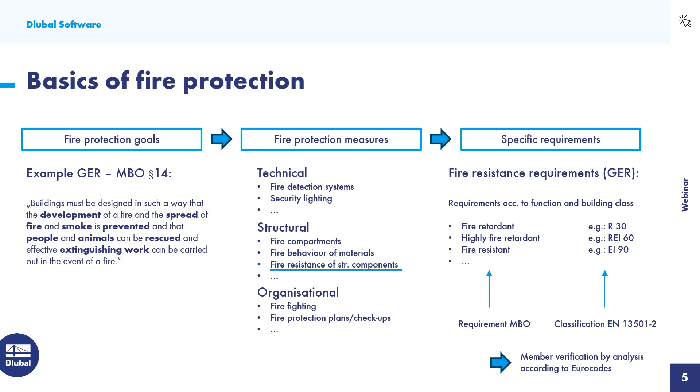So let's take a look at how fire design is regulated in the Eurocodes. I would like to start with the combinatorics. According to Eurocode 0 or EN 1990, the case of fire is to be regarded as an exceptional design situation. Accordingly, the mechanical actions are combined without partial safety factor.

The use of ψ2,1 is recommended in the main document for the leading variable action, but there are many deviations in national annexes. In Germany, for example, ψ1,1 is prescribed for leading wind actions. It is obvious that the combination rule results in significantly lower actions when compared with the permanent and transient design situation that we commonly use for the design under normal temperature.

As a safe side assumption, the loads from the code design multiplied by a reduction coefficient can also be used. However, this is generally uneconomical and therefore not recommended, especially when we use a design software that can do the correct combinations anyway, like RFEM.

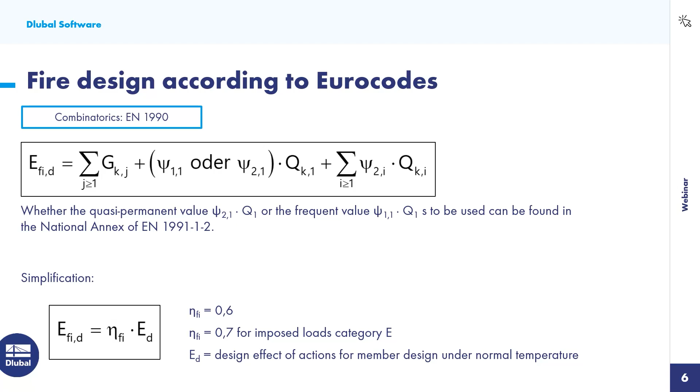In addition to the mechanical actions, the thermal action in accordance with EN 1991 Part 1-2 must also be taken into account. In the event of a fire, there's a considerable increase in the ambient temperature, and sooner or later, the structural elements exposed to the fire will heat up as well. This has a dramatic effect on the material properties of steel components on one hand. On the other hand, the temperature increase can lead to indirect stresses in case thermal expansion is restrained.

Real fire scenarios develop in 4 stages. We have the incipient stage, the growth stage, the fully developed fire phase, and the decay phase. The transition to the full fire phase is called flashover and is associated with a rapid rise in temperature.

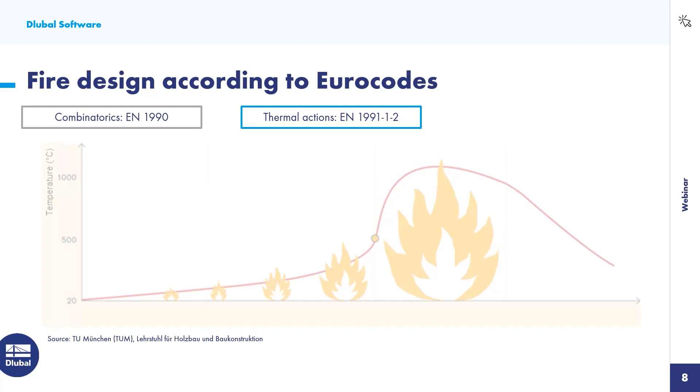For engineers, it is very challenging to accurately predict the development of a natural fire scenario. Instead of trying, so-called nominal fire curves have been established almost 100 years ago to describe the temperature development in a compartment over the duration of the fire in a simplified manner. The standard temperature curve is used for fires inside buildings.

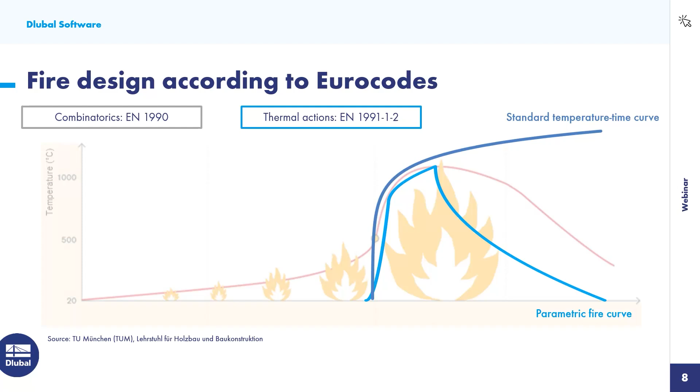This temperature curve is also used for standardized fire tests on structural elements, which means that the behavior of typical elements under this nominal fire exposure is quite well documented and verified. Alternatively, the Eurocode also allows the use of more sophisticated approaches to predict the temperature development, such as parametric fire curves, zone models, or results from CFD analysis.

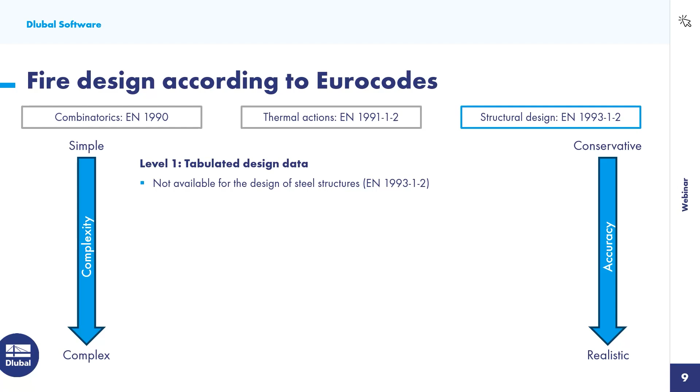The actual design of structural elements is regulated in the respective material-specific Eurocode, such as Eurocode 3 Part 1-2 for steel construction. In principle, all Eurocodes distinguish between 3 alternative methods with increasing complexity and accuracy. The simplest design approach is design by tabulated data. This is oftentimes used for fire design of concrete elements, where it is sufficient to choose the suitable dimensions, for example, wall thickness, for a specific fire class. This approach is unfortunately not available for steel structures.

In the second level, we find the so-called simplified design methods. Here, the thermal actions are prescribed by nominal fire conditions, such as the standard temperature curve for fires inside of buildings. For such conditions, Eurocode 3 Part 1-2 gives clear rules for the design of steel members. This verification can either be done based on the resistance or based on the critical temperature.

The most accurate but also complex analyses are possible under the advanced design methods. The thermal actions are usually derived by more sophisticated methods here, such as parametric fire curves, zone models, or CFD. This enables a more economic design most of the time. The design rules are very openly formulated. Any suitable thermal and mechanical analysis model can be employed. However, the validity of the chosen approach must be proven on a case-specific basis and requires a high level of expertise.

In RFEM 6 and also RSTAB 9, the resistance-based simplified design method is implemented. A system calculation under elevated temperatures is not required in this case. The design concept is very similar to the design under normal temperatures, but under reduced load as we combine actions in the exceptional design situation. The thermal action is only taken into account on the resistance side and induces a reduction of design-relevant material properties. I would like to explain this point in more detail in the next slides.

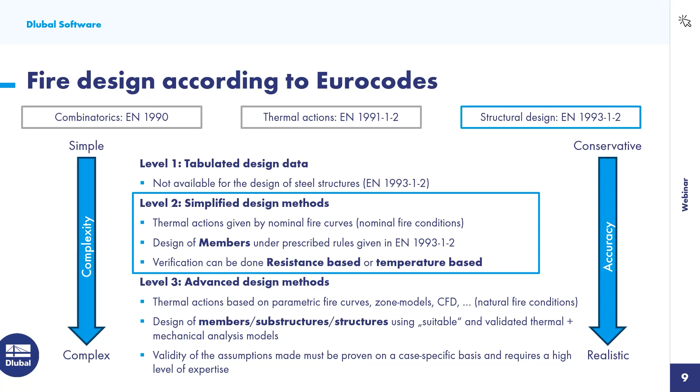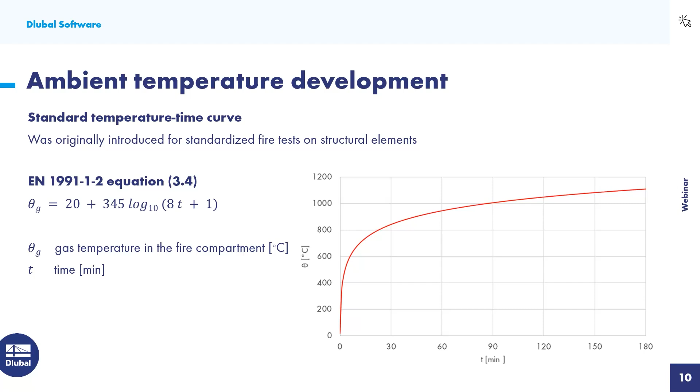As explained on the previous slide, the simplified design method is linked to the application of the standard temperature curve. This means the development of the ambient temperature during a fire is approximated in a simplified manner according to the logarithmic function shown here. The standard temperature curve idealizes the full fire phase and neglects the growth and decay phase of the fire.

So the development of the ambient temperature is specified by the standard temperature curve. However, for design purposes, we are interested in the actual temperature of the structural member. According to EN 1991 or Eurocode 1, Part 1-2, two different components must be taken into account when analyzing the transport of heat from the surrounding hot air into the heated component: the heat flux from convection, so the exchange of heat between the hot ambient air and the cold component surface in the boundary layer, and the heat flux from radiation or thermal radiation.

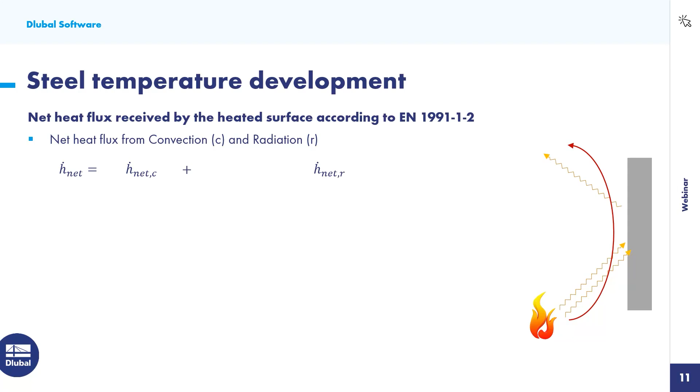I know there's a lot to explain, but I would like to leave the formula as it is right now. We will come back to the various parameters in detail later, as they are important influencing variables for fire design and any fire protection measures. For now, we take note that we can describe the relationship between ambient temperature and component temperature in the event of a fire. But how does the member temperature actually affect the design?

According to Eurocode 3 Part 1.2, design-relevant material parameters such as the yield strength and stiffness must be reduced depending on the material temperature. The yield stress only has to be reduced at temperatures above 400 degrees Celsius, but then quite rapidly, as you can see here. The stiffness already decreases at significantly lower component temperatures. At a temperature of around 600 degrees Celsius, the reduction of the yield stress already accounts for roughly 50%. At 800 degrees Celsius, it is almost 90%, so there's only very limited resistance left.

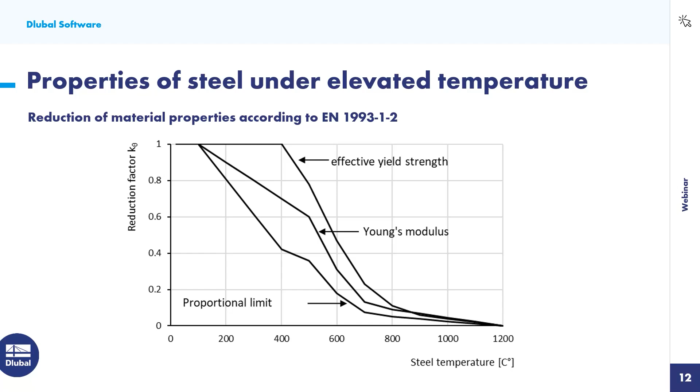Okay, so I have already prepared this simple model beforehand. It's just a simple beam with an intermediate support in lateral direction in the middle. It's an HEA 300 section and 10 meters long. I think the steel is S235. Yes. This member is already loaded by 3 load cases: self weight of the beam itself, then dead load, an additional 5 kilonewtons per meter, and load case 3 is imposed load category B with 7.5 kilonewtons per meter.

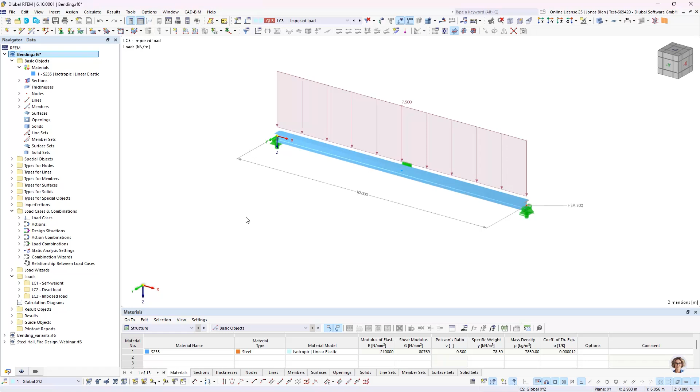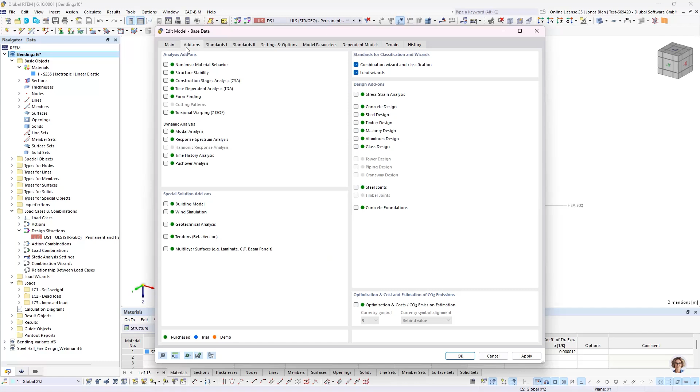I've also defined one design situation for the code design of this member, the usual combination permanent and transient, as you can see here, and this results in automatically generated load combinations. I want to start with the code design. So I switch on the Steel Design add-on, go to standards, and for now I will just use the main documents of the Eurocodes and use the common rules.

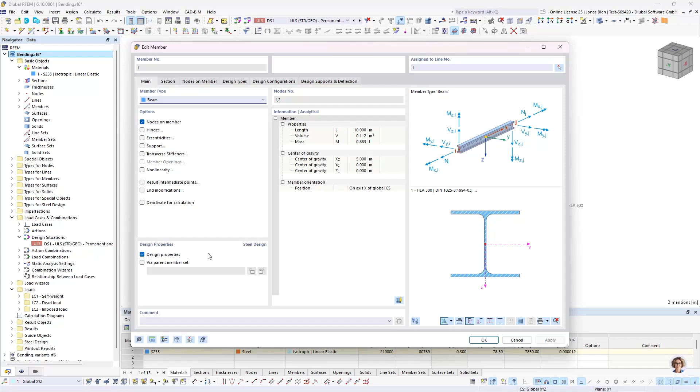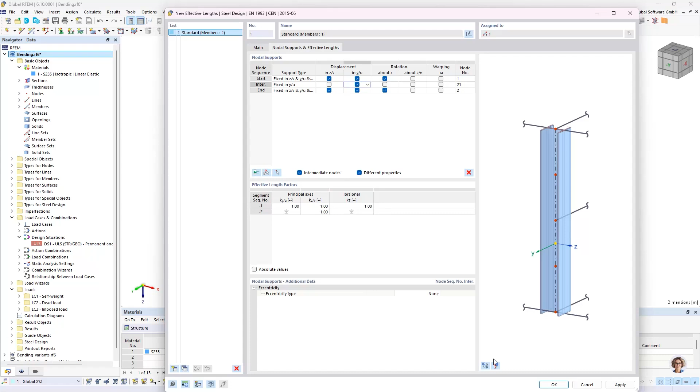As we are used to, the design add-on has already recognized that we have this member that can be designed with our Steel Design add-on. So that's fine. Besides the section checks, I also want to do the check for lateral torsional buckling according to the equivalent member method. So I will also define an effective length. And I want to leverage the intermediate node, so I will assign a lateral support here in the middle, as we have modeled it in the global model as well.

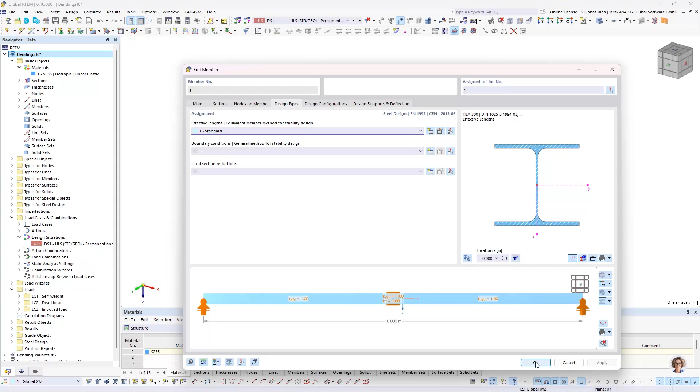Okay, so let's do this. And by the way, this assignment of the buckling length is valid for the code design and also for the later fire design that we are doing. But for now, let's start with the code design, the usual thing that we know. I will just run the simulation now, this very simple case, and we will check the utilizations that we get under normal temperature.

So as we are used to, we get section checks for shear and bending. There's also, I think, shear buckling. And since we also activated the buckling length, we also get the stability check for lateral torsional buckling. We can see that the maximum utilization is around 83%, so this is completely fine. Everything's good so far. So now let's see how this changes when we investigate the fire scenario. Let us do all the adjustments that we need in order to activate this.

First of all, we need a design situation that is appropriate for our fire case. So I will add a second design situation for the accidental load case using psi 2,1 as it is prescribed in the main documents of the Eurocode. We can again check the combination rule, and this is totally fine for us and looks like the rule that I showed you before in the slides. Okay, so I get two additional load combinations now for the fire situation.

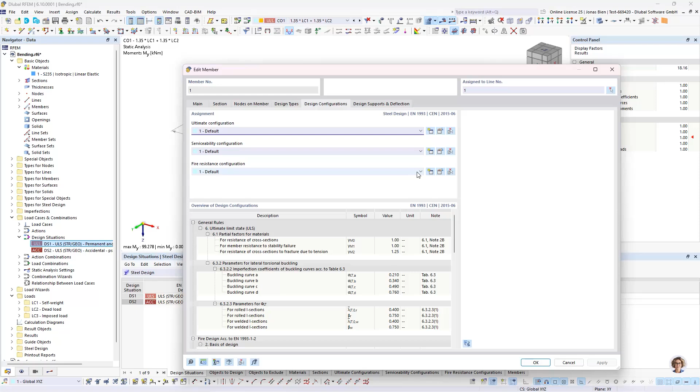And in here, we have to, first of all, define what the resistance class of my member is going to be. So at what time I want to perform my fire design checks. In this case, I would assume that my member needs to survive for 30 minutes, so it has an R30 requirement. So I will set 30 minutes as the required time for the fire resistance.

We can also see that here under the temperature curve for determination, we have by default set the standard temperature time curve, and this is the one that we want to use for internal fires and the member design method here. We could also give a manual temperature that the program then takes to perform the fire design checks, but we want to have the temperature of the steel defined by the standard temperature time curve here. And we want to do the check after 30 minutes. The remaining parameters I will not touch yet. We will come back to this later.

So I will just assign this by clicking OK, and then I will run the steel design again. So we have to solve now the two additional load combinations, and then the steel design runs again. And first of all, I want to compare the forces that we now have to take for the design. So if we check the maximum bending moments for design situation 1, so for the cold design case, we have a maximum bending moment of almost 240 kilonewton meters, while in the second design situation under accidental combination, we get more or less 100 kilonewton meters.

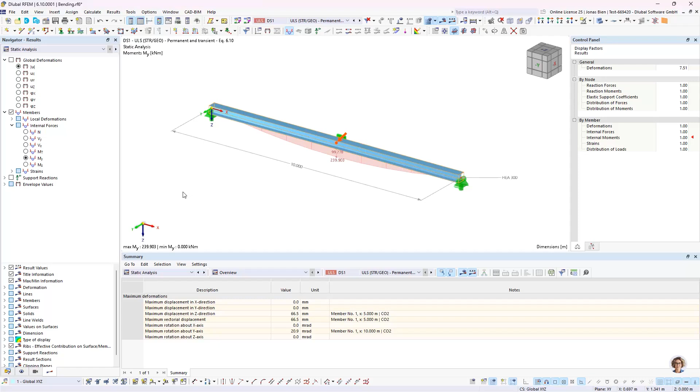So the load that we need to take into consideration in the hot design is much smaller than in the cold design. However, as we could already see, we now have a big problem with our design verification checks. As we can already see here, the maximum utilization is over 300%. So that's not good at all. So let's check why that is, and how come the utilization is so much higher than in the cold design stage. So let's actually compare some design checks.

We could start with the bending check here about the strong axis. We will start with the cold design. So we are very used to this. So we have the 240 kilonewton meter design bending moment. We do the section classification. We see we have a class 1 section. That means we can use the plastic design resistance here to calculate our utilization. And in this case, we have a utilization under 80%.

But how does this change in the fire design situation? So let's check the respective check under increased temperature. We see we have a smaller design bending moment as already shown before. And now we already also have a different section class. That is interesting. And we can also check what is the reason for this.

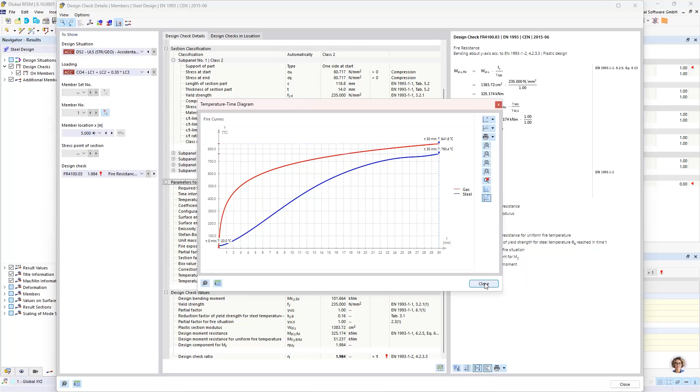There are also some other parameters here given for fire resistance. Up here we find all the settings that we have assigned to this member by the fire design configuration. And then we have some additional parameters here that I will focus on later. But for now, we can see, okay, for the cross-section checks, we have a drastic reduction of the resistance due to the increased temperature, which is very high in this case.

Maybe we can also check the stability design check, because that also reveals some details to us. So first of all, we calculate the critical bending moment the same way as we do it for the cold design. So I think this 757 should be the same for the cold case as well. When we check the stability design check, yes, it is 1-to-1.

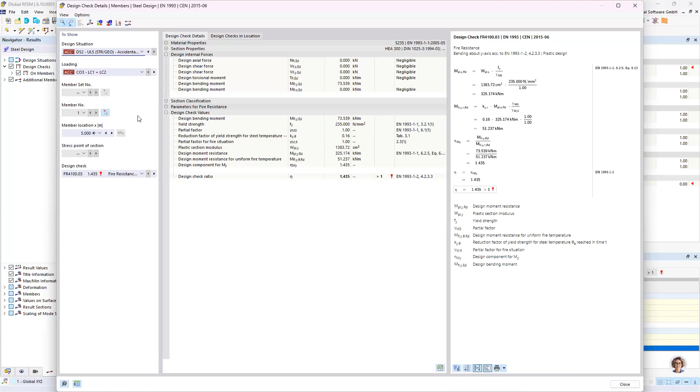But then in the fire situation, we have to again reduce it by taking into account a modified dimensionless slenderness. And in this case, this dimensionless slenderness is not only modified by the reduction factor for the yield stress, but also depends on the reduction factor of the stiffness, because of course stability design checks are also very much dependent on the stiffness of the system. So any degradation on that side will also alter our verification check for instability.

Another important point is the derivation of our imperfection factor. While in the cold case, this is dependent on the cross-section buckling curve, here it is only dependent on the material of the section. So there are slight adjustments, but otherwise the schema for the verification checks is very similar to the cold design case.

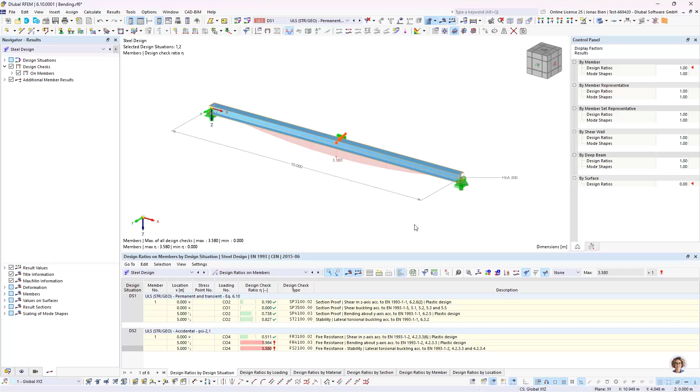I think we can agree that our first attempt to verify the fire resistance of this beam was not very successful. So yeah, what can we do to increase the fire resistance of our beam? Of course, we could lower the loads or increase the section size, but we have seen that the member heats up very quickly and we have thus only minimal strength and stiffness after 30 minutes.

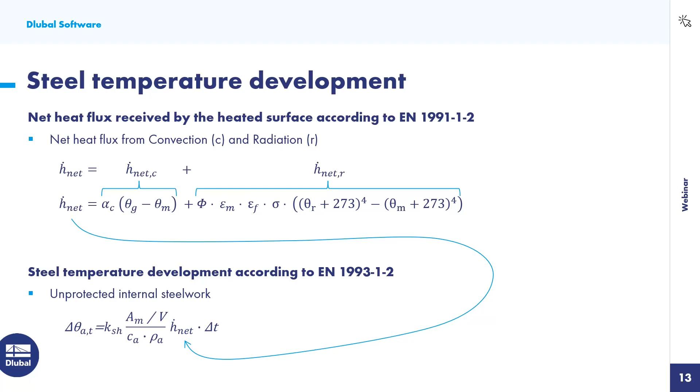To discuss possible measures we can take to delay the heating process, I would like to come back to our formulas that describe the heat transfer from the ambient temperature into the structural element. So we've seen these before, and if we combine the two formulas, we get this quite long expression here.

Most of the parameters represent physical constants that we as structural engineers cannot influence as much as we'd like to. There would be the specific heat of steel, the density of steel, the coefficient of heat transfer, the configuration factor, the emissivity of fire, and the Stefan-Boltzmann constant. Those we shouldn't touch at all.

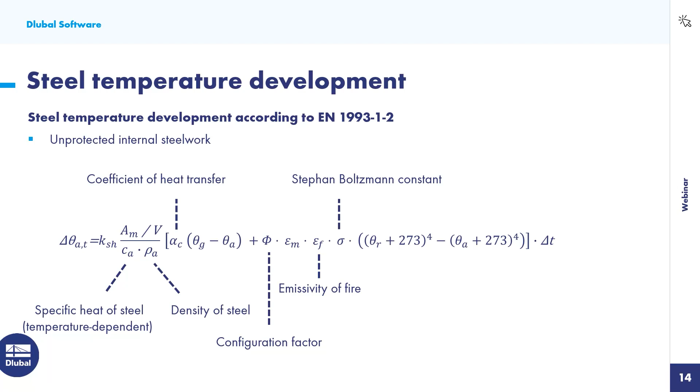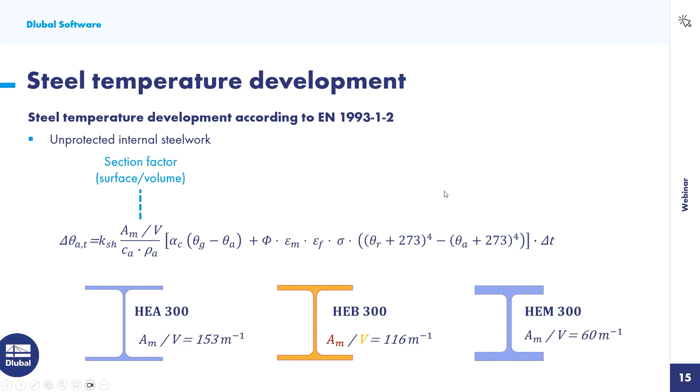This means that more compact cross-sections have a lower profile factor, as demonstrated here in these example calculations, and as a consequence, and since the profile factor is in the numerator of this heating equation, compact sections heat up more slowly. And we will check this in a minute in the model again.

But there are also other ways to reduce the profile factor. For example, if one side of my cross-section is protected from direct fire exposure, as shown here in the lower left figure, I can reduce the circumference by one flange width.

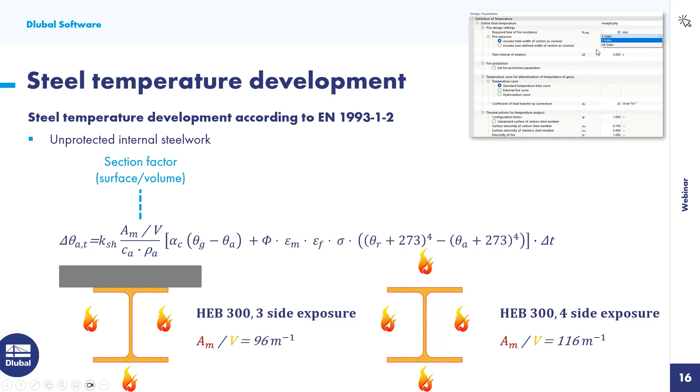So this could be relevant if we place a column next to a concrete wall or put a concrete slab above a steel girder without leveraging composite action. Such a situation can also be considered in our program through the fire configuration settings. I will also show this later.

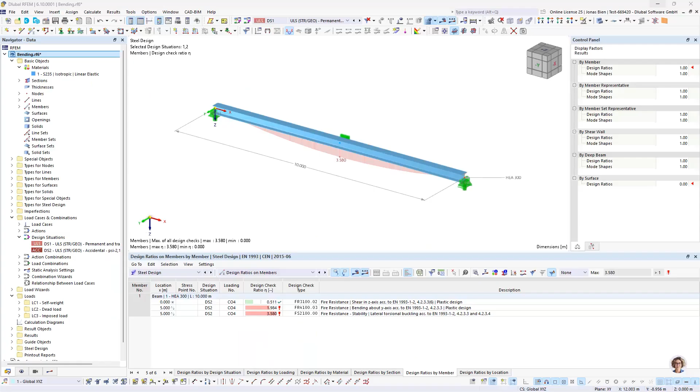Let's check if we can observe the described behavior also in our program by taking the appropriate settings. So let us switch to RFEM again. I have also prepared a second model where I basically just copied my simple beam HEA 300 that we discussed before and changed the section into an HEB 300 and HEM, as I've also shown you as an example on the slides. I applied the same loads and so on, and I conducted the fire design checks here.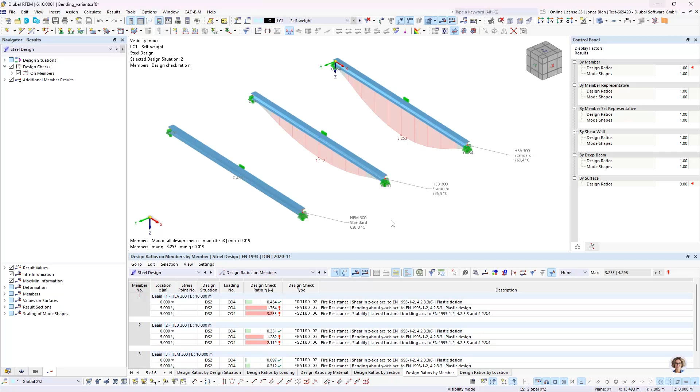And it's of course no miracle that the utilization factor for the bigger profile HEM 300 is lower. This is expected when we choose a more capable section. HEM has a higher bending resistance and also much lower slenderness, which comes into play when we look into the lateral torsional buckling design check.

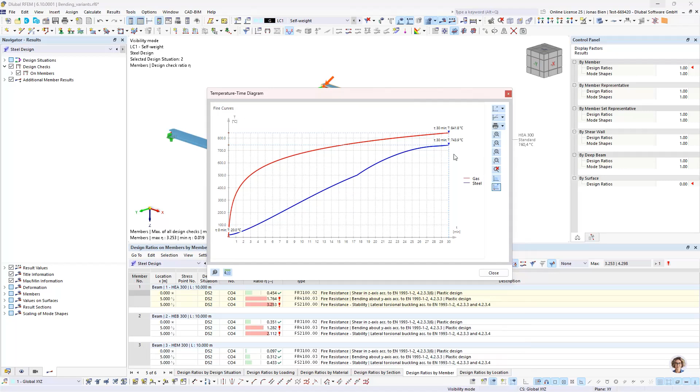But we don't want to focus on that, but on the member temperature and how it develops during the fire event. We have already checked the temperature development for our HEA 300, and we've seen that at 30 minutes we have 743.9 degrees Celsius. The HEB 300 is only a bit colder, at 735.9, but comparing this to the HEM, we see that by taking this much more compact section, we get a lot less heating. The HEM only has a temperature of 628 degrees Celsius after 30 minutes, although unprotected.

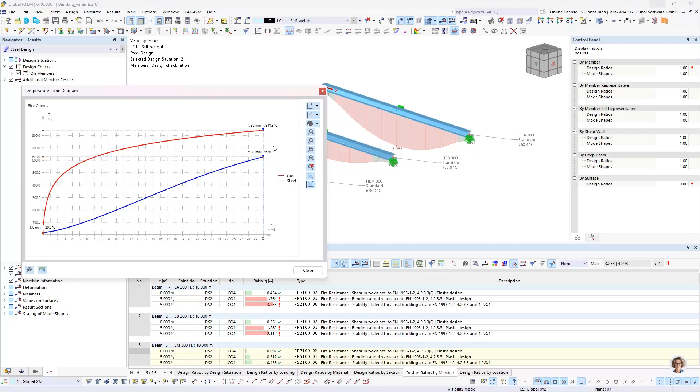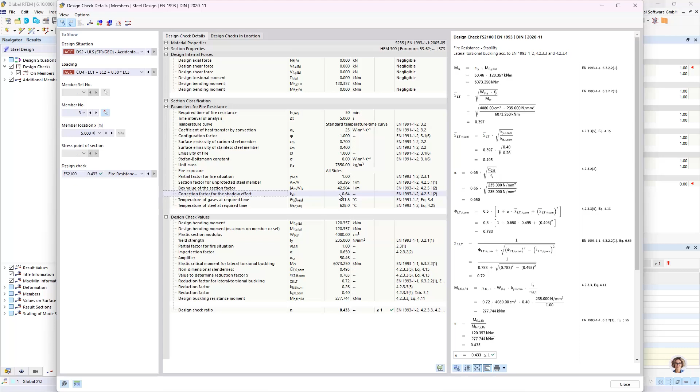We said this is because of the profile factor, and we can check this profile or section factor here in the design details for all these members. As we move on to member number 3, which is the HEM, we have a very low section factor, resulting in lower temperatures. We also see the correction factor for the shadow effect that we talked about, also given in the design details.

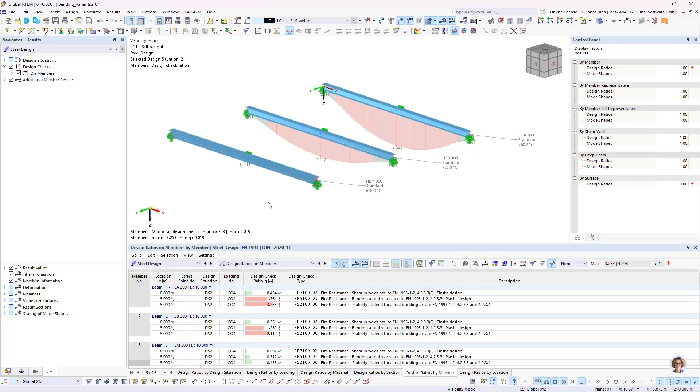Okay, so we also talked about a second option to reduce the profile or section factor, and this would be by avoiding all-side exposure to the flames, for example by a concrete slab. I have also added another example where I modeled an HEB 300 and modified the fire resistance configuration so that I only apply a 3-sided fire exposure. As a result, compared to the standard fire case with 4-sided exposure, it heats up around 30 degrees Celsius less after 30 minutes, which isn't a huge deal, but it's something.

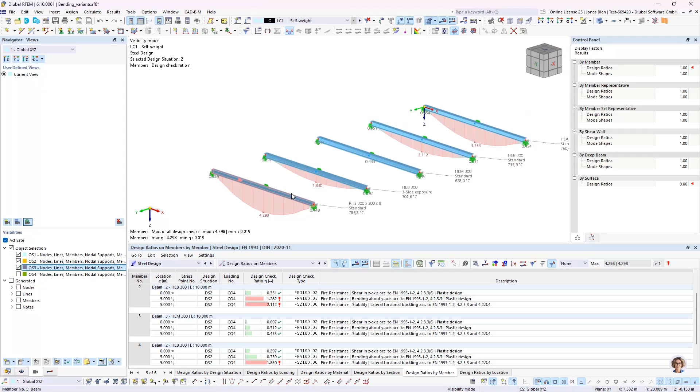And last but not least, I wanted to show the influence of this correction factor for the shadowing effect. So I also incorporated a hollow section here, an RHS profile, which has a similar section factor as the HEB 300, but it doesn't profit from the shadowing effect. In the design details we can check the k_sh factor, and in this case it is 1.0. So we couldn't leverage any of this here, and accordingly it heats up a bit more.

Okay, that's about the section choice and how the section choice modifies or impedes the heating process of the member during the event of a fire. But there's actually another factor that we can manipulate and alter to adjust the heating process. So let's go back to the PowerPoint, to the next slide.

Yeah, I would now like to discuss this factor here, epsilon m, which describes the surface emissivity of the member, not of the flame, but of the member. And this factor describes how large the proportion of absorbed radiation energy is. An ideal black body has an emissivity of 1 and absorbs all incoming radiation in theory. An ideal white body has an emissivity of 0 and reflects all radiation. Real surfaces have values between 0 and 1.

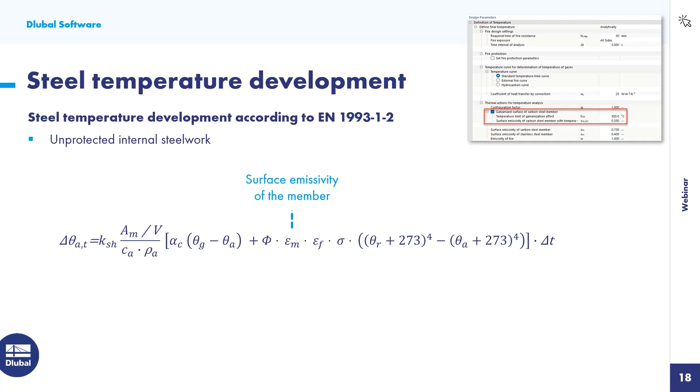So as part of a research project at the Technical University of Munich, it was discovered that galvanized steel has a significantly lower emissivity than non-galvanized steel. We can leverage this effect at least up to a member temperature of 500 degrees Celsius, and only for shiny zinc coatings that we get for hot-dip galvanizing category A and B steels.

If I am correctly informed, this additional regulation has already been included in the draft of the second generation Eurocode. In Germany, this option has already made it into the majority of state building regulations via an additional guideline published by the Institute for Hot-Dip Galvanization, named the DAST Guideline 027. So we can also take this galvanization into account in our program. I think it's simpler if I show it to you just in the program.

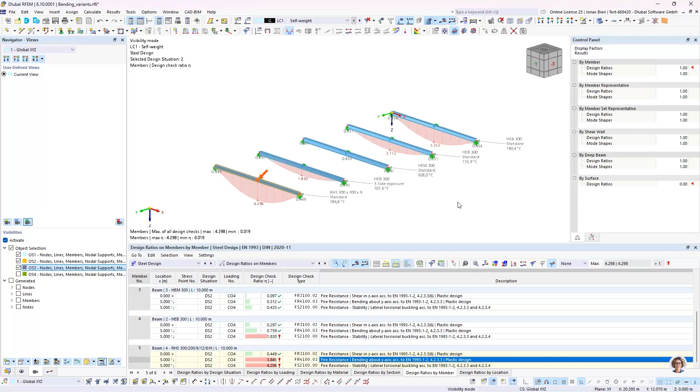So let's just jump back. And now I want to modify the selection of the members that I have modeled up front. So I again have copied all of those members that I've shown you before, different sections, and also the HEB with the three-sided exposure, and modified the fire design configuration in such a way that I also changed the emissivity by galvanizing the surface of the carbon steel. I can do that by just activating this option here, and then it also takes into account this limiting temperature of 500 degrees Celsius, and until then uses a lower surface emissivity.

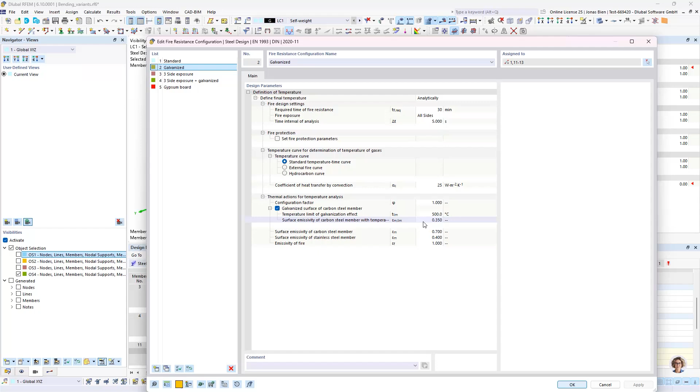Okay, so let's see how this again affects the heating up of the member. We can see for HEA it does not have such a huge effect. Same goes for the HEB300. Let's actually look into one of those diagrams, because it reveals the fact that the emissivity changes at a temperature of 500 degrees. So as we can see here, there's a significant dent in this curve, and this is at a temperature of 500 degrees Celsius and marks the point where the emissivity jumps from 0.35 to 0.7.

For the HEM profile, actually the influence of the galvanization is very huge. Instead of a temperature of 628 degrees Celsius, we get a temperature that is almost 150 degrees lower after 30 minutes. And that's mostly because for the whole 30 minutes, we are below a member temperature of 500 degrees Celsius, which means that until the end we can leverage the lower emissivity of the member surface. And then, of course, the benefit is much greater, because it's more or less the integral of the heating over the time.

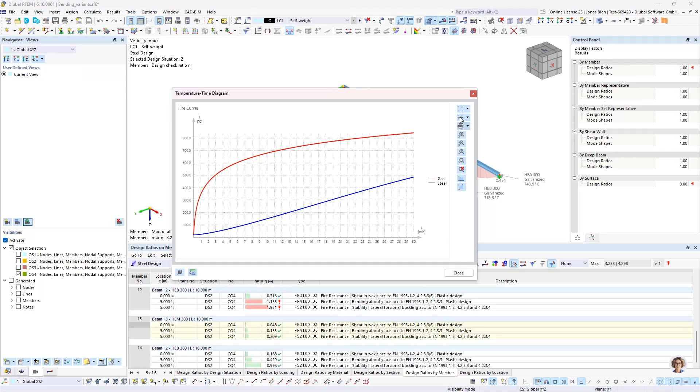But it is also interesting that, for example, when we consider an HEB300 and maybe anyway have one side of the section covered by, for example, a concrete wall, and we then take into account additionally the galvanization that we might anyway have because of corrosion protection measures, we see that we can reduce the member temperature from 701 degrees to 633, and under this temperature we are even able to fulfill the verification checks, and instead of a maximum utilization of 200 something %, we go under 100. So without any additional measures in this case, we could already fulfill our fire verification checks.

All right, last but not least, let us talk about conventional fire protection systems. Therefore, I would like to switch back to the PowerPoint presentation.

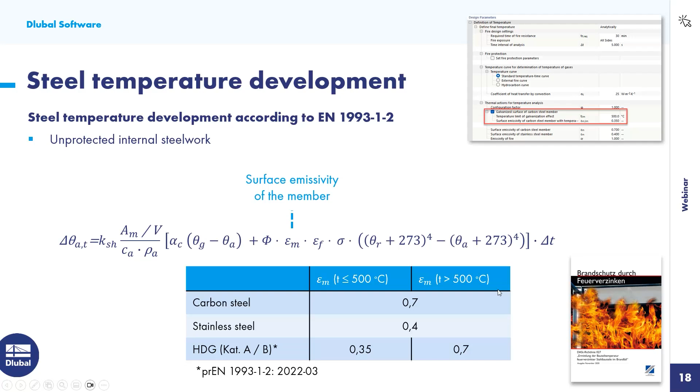So, as said earlier, the possibility to improve the fire resistance by galvanization is very interesting, as many steel structures are galvanized anyway for corrosion protection. And in this case, the improved fire protection is a nice bonus. But conventional fire protection systems exist as well. They have a much higher protective value, and they can also be taken into account in our program.

We can take into consideration spray plaster or board encasement, and such systems can be taken into account by using an alternative formula provided by the Eurocode 3 Part 1.2 for the temperature development in internal steelwork that is insulated by fire protection material. In addition to some of the parameters that we have already introduced earlier, the properties of the fire protection system are also taken into account. So we have the thermal conductivity of the fire protection system, the thickness of the fire protection system, and the specific heat and the density of the fire protection system.

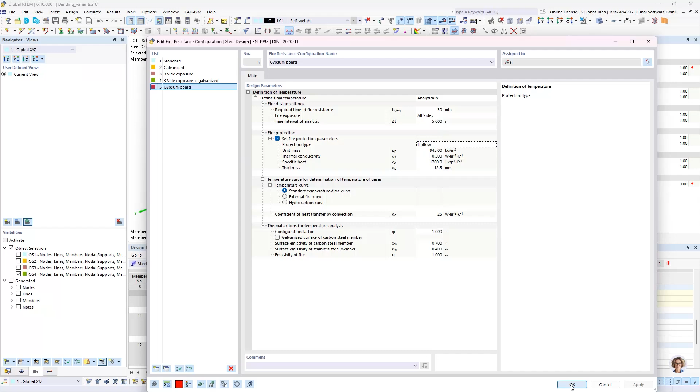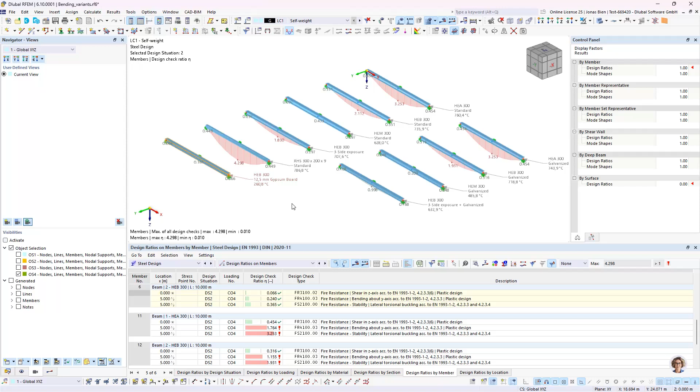And what I can see is that this has a dramatic effect on the temperature. In this case, by the encasement, I get a very low temperature after 30 minutes, below 300 degrees Celsius. So higher fire resistance classes of R60 or R90 can also easily be realized with such sophisticated fire protection systems. Okay, we have now dealt extensively with the fire design assessment of a single member and checked how we can influence the temperature development in that member in the event of a fire.

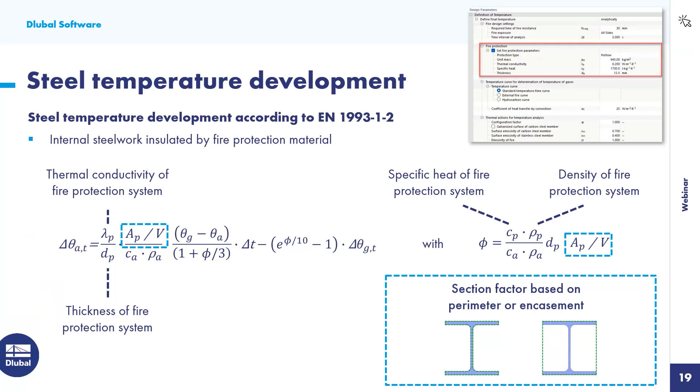So in Eurocode 1, Part 1.2, Section 4.2(1), it is written that indirect actions from adjacent members need not be considered when fire safety requirements refer to members under standard fire conditions. And then there is also the clause in Eurocode 3, Part 1.2, Section 2.4.2, that the effects of thermal deformations resulting from thermal gradients across the cross-section shall be considered. The effects of axial or in-plane thermal expansion may be neglected, though. And because the formulas that we use to determine the heating of our section always assume a constant heating over the section, we don't need to take into account the thermal deformations at all.

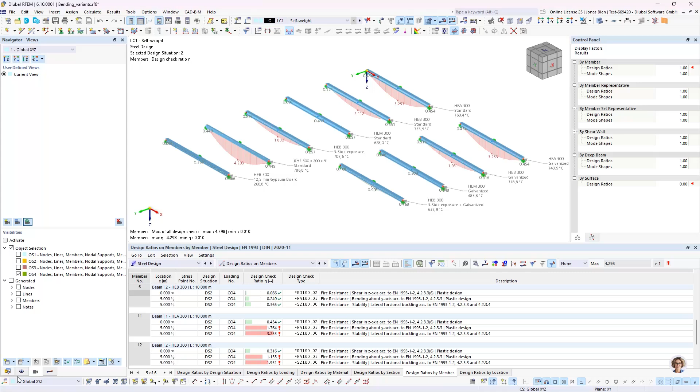Okay, let's go back to the program and go into the third model I have prepared, which is basically the steel hall that you have seen on the slide before.

In order to calculate these indirect actions, we first need a temperature that we want to apply to the model. And this temperature we could either derive by the standard temperature curve, or by some other specification or a parametric fire curve, CFD analysis, whatever it is coming from. We need to make some assumption about to what degree our structure heats up. And then we can apply this temperature load via, for example, a member load.

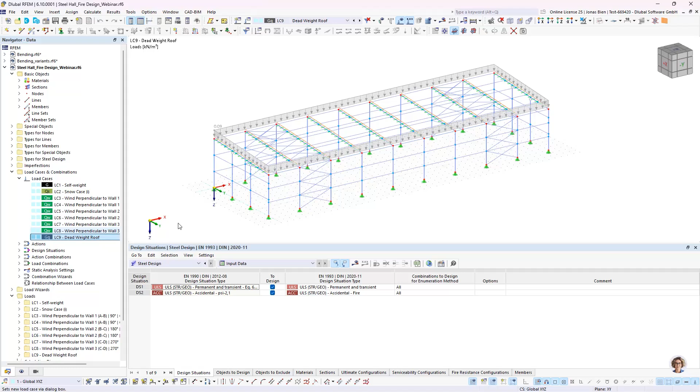So I want to go ahead and create a new load case for this temperature load. And in this load case, I think it's sufficient to do it here. We want to analyze the effect of the thermal expansion. So I create a load case 10. Let's name it temperature.

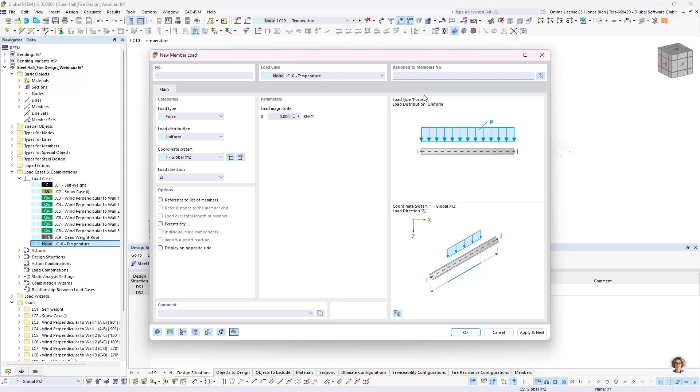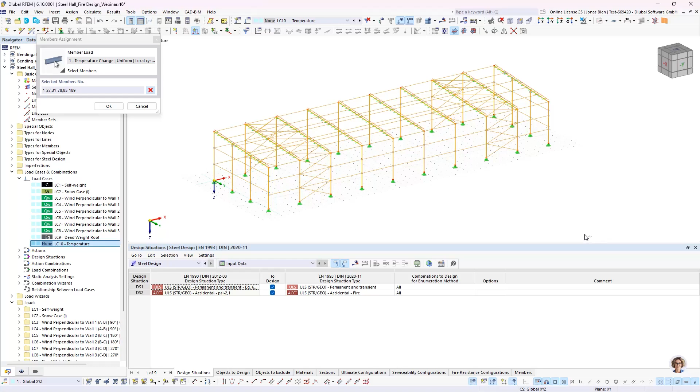And in this load case, let's say we aim for a 30-minute fire under a standard temperature curve that would give us an ambient temperature of around 800 degrees Celsius. I have many sections here, of course, they would all heat up differently, but I will now just, on the safe side and for demonstration purposes, apply a uniform temperature change to all members of 800 degrees. So that's just some assumption. Okay, so I select all members and apply a constant temperature increase over the section.

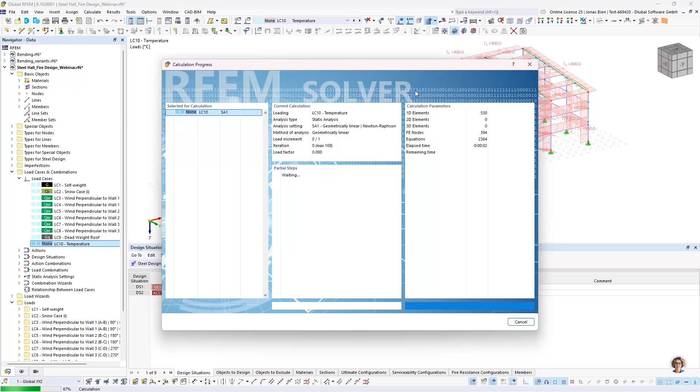And now I could just run this analysis here, calculate the resulting reactions under this temperature increase. And I would be actually shocked because, as you can see here, we get very large restraining forces.

So as I already mentioned, the steel wants to expand, and we have in this steel hall bracings in some of these bays, and the compression members between those braced bays cannot expand very much. So the thermal deformation actually goes into axial force, and we get a very huge compressive action in these members. But now we have to consider one thing.

Eurocode 3 Part 1-2 says that we also have to modify the mechanical properties of the steel at elevated temperatures, and we can take this effect into consideration as well, because when we remember the diagrams we looked at regarding the properties under elevated temperatures, we do not only decrease the strength of the material with increasing temperature, but also the stiffness. And the lower the stiffness, the lower these restraining indirect actions will actually be.

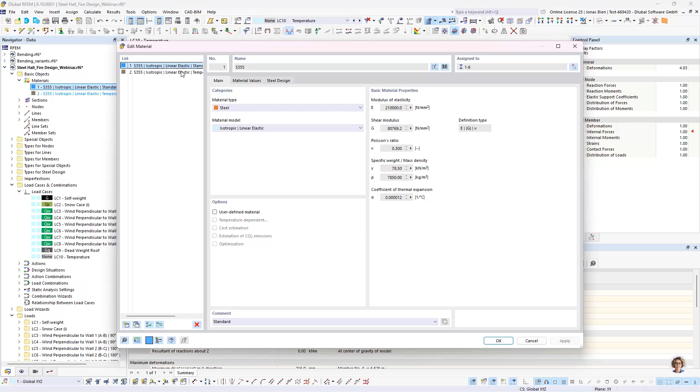So I have already prepared two materials. The first one that we just used for the first calculation step was just a regular mild steel S355. And the second one is a copy of that, but here I activated the user-defined material option and the temperature-dependent option. By doing so, I am allowed to enter a temperature-dependent modulus of elasticity, for example, and this curve is just copied from Eurocode, basically. All these points are given in the Eurocode document, and we can leverage this to enter our temperature-dependent material properties.

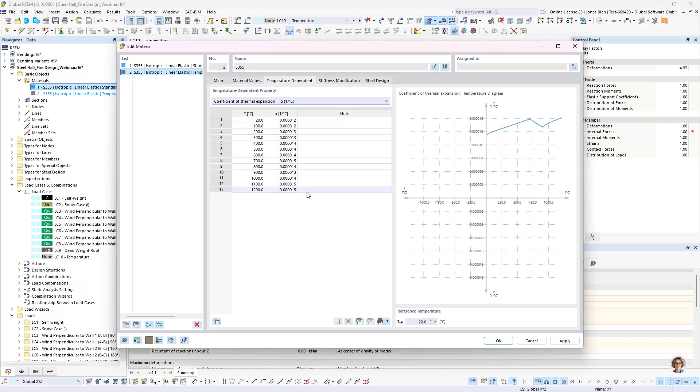Also, the coefficient of thermal expansion is dependent on the temperature, and I can take this into account as well. Now let's see what happens if we take the temperature-dependent material into account, and how this affects the indirect actions that are generated under elevated temperatures. We remember we had in the first attempt compression forces of over 1 meganewton. Now we go into the simulation again with the temperature-dependent material.

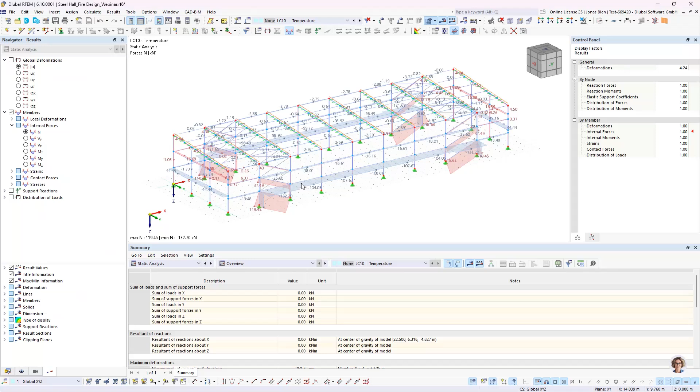Let's wait a bit, but we should see that those compressive forces are very largely reduced. Yeah, we can see that it is almost reduced by a factor of 10. So now the compressive force that's left over at the temperature of over 800 degrees in the member is around 100 kilonewton.

So whenever we want to take these effects into account, we always have to remember that not only do we have these restraints that add some actions into our model, but we also at the same time have the degradation of the material properties, which in this case helps to lower these restraining forces in the model.

Okay, so that's it for that question. Let's move on to the next one.

How can we modify buckling length and boundary conditions for the fire design situation? Eurocode 3 Part 1.2 allows for reduction of buckling length in some specific cases. Such design situation dependent modifications of the buckling length can be taken into account with our construction stages add-on, and I want to quickly show you the necessary steps how to set this up.

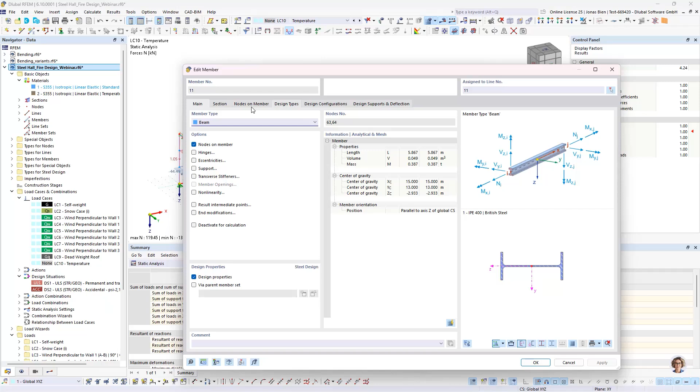So let's go back to the program again. I don't want to go into a detailed explanation of the construction stages. There are some additional webinars that you could look into if you're interested, but just show you the procedure, how can we modify the buckling length. So in this model, I think there are some buckling lengths for those columns here applied, for example, and we want to change them for the fire design case.

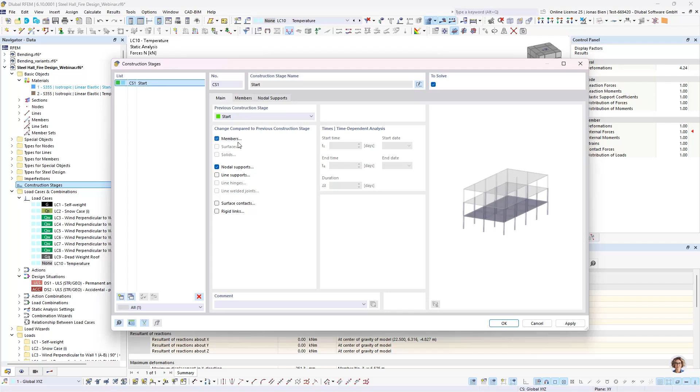So I activated the construction stages add-on, and I create a new construction stage where I want to activate basically all my objects that are relevant for my analysis. So all the members and nodal supports. I don't have any line supports or surface contacts or rigid links. And then under the member tab, I can not only activate or deactivate members here, but I can also modify them. And for example, I could now say, okay, this column here,

for this column, I want to define some steel design configuration, for example, the effective length settings. And I could now override my original assignment of buckling length with a new one. Let's just take for demonstration purposes the type 2 I have already defined. But it could be every effective length type that I have maybe modified from the original version.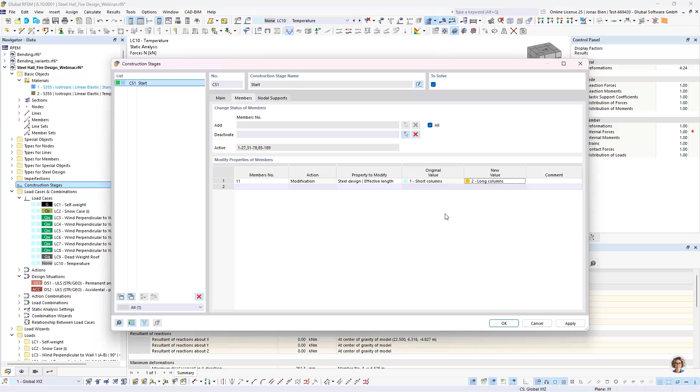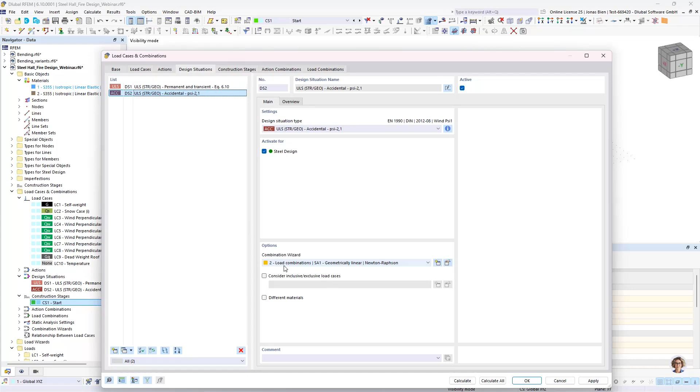Okay, I apply this with OK, and the thing I then need to do to assign this construction stage to my design situation 2 is that I need to apply all the load cases to this construction stage, and the easiest way to assign the construction stage to all load cases that are generated in design situation 2 is if I modify the combination wizard. So let's just copy the first one actually.

And now in this case, we want to consider an initial state. And this initial state is defined as our construction stage 1. I apply this with OK. And now let's see how those load cases look like. And I can see for all the generated load cases, construction stage 1 is now considered as being active. And that also means that the buckling length modification would be active.

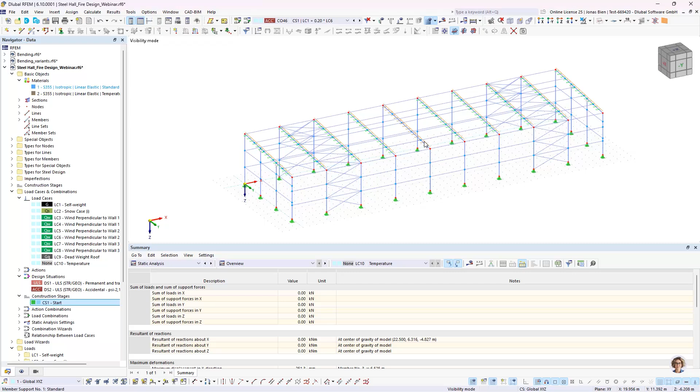A second scenario would be that you may want to change a boundary condition for the stability checks, for example, or other stability checks. For example, in this case, when I want to leverage the rotational restraint of these girders in the cold design case, I may wonder, if it comes from a trapezoidal sheeting, if I should take this beneficial effect of the trapezoidal sheeting also into account in the fire design scenario, because if I imagine that there's a fire in this steel hall, these trapezoidal sheetings, they heat up very fast because they are very, very thin, just 1 or 2 millimeters.

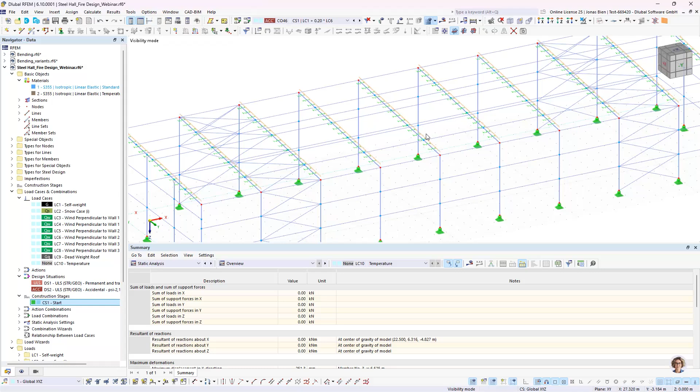And as we learned, the material properties degrade very fast, and I wouldn't have a lot of stiffness that helps me in my lateral torsional buckling design check in the fire design situation. So if I want to be on the conservative side and don't want to use this beneficial factor in the fire design situation, I could also deactivate these member supports in that case. And that can be done via structure modification. I could assign the structure modification also to the combination wizard. That would be the most elegant way to have it active in all the load combinations that are then automatically generated. So I again open the combination wizard and now also in addition activate the structure modification.

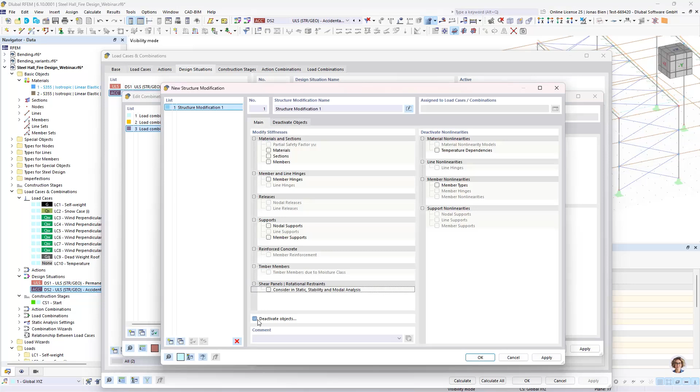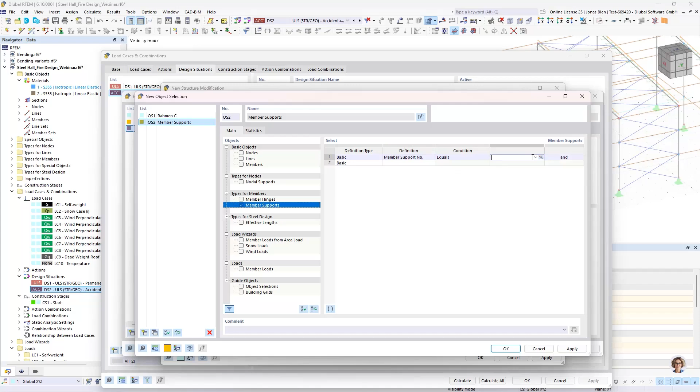And in that structure modification, I want to deactivate specific objects. In that case, I want to deactivate the member support, and to tell the program which member supports I want to neglect, I need to create this object selection. And here I can, for example, select the member supports by their number. And I can also select the member supports I want to deactivate graphically. I need to make them visible first. Here we go. And in this case, I would also take into account the structure modification.

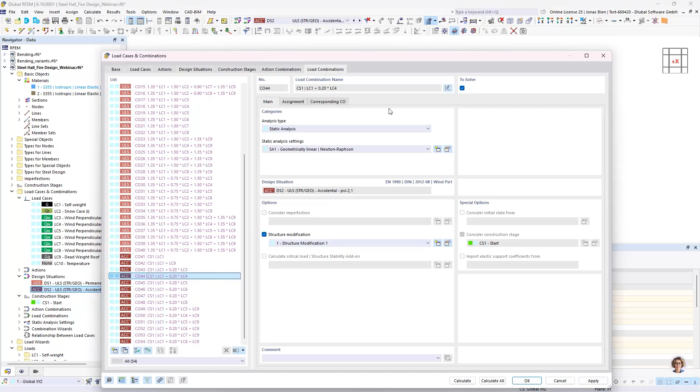And again, all the generated load cases and load combinations would have not only this construction stage where I modified the buckling length, but also the structure modification where I deactivated those rotational restraints here for the stability design of those girders. So I could do all of this.

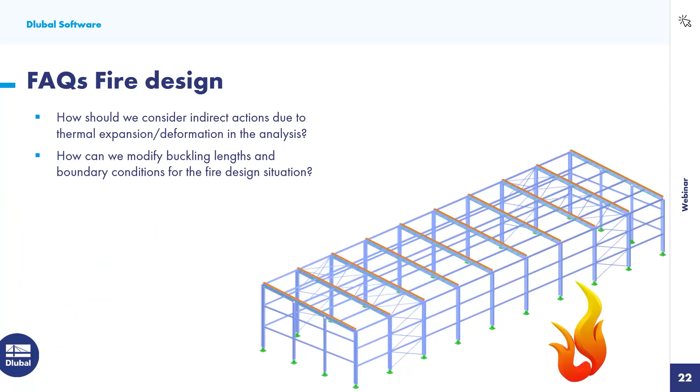I am actually not sure in which cases I would do so, because the Eurocode also has a paragraph on how to define or how to take the boundary conditions into account in the fire design situation. And it actually says that the kinematic boundary conditions at supports and ends of members applicable at room temperature may be assumed to remain unchanged throughout the fire exposure. So this is just if you want to change something to be on the conservative side, you know how to do that. I have shown you now, and it's a bit engineering judgment if you want to modify those in the event of a fire.

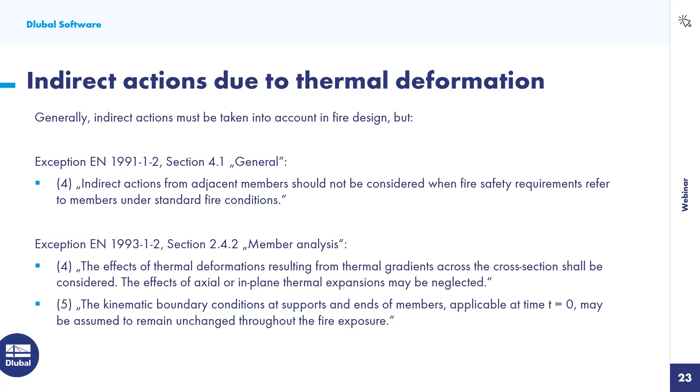Okay, the third question considers the verification of steel joints. Of course, when thinking about a complete steel structure, we should not forget that we also have to verify the joints besides the members. And in RFEM 6, we have a dedicated add-on called Steel Joints for the verification of joints. But unfortunately, the design under fire conditions is not considered therein, at least not yet. But experience from real fire events shows that joints are often not problematic.

This is mainly due to the local mass concentration caused by welded-in sheets or stiffeners and bolts in that area. And the increased mass means that the joint usually heats up much less than the connected members. We also have significant shadowing because of these additional plates usually, which also affects the heating process. As a consequence, Eurocode 3 Part 1-2 provides very simple rules for the verification of joints that you can leverage under elevated temperatures. And I think this is sufficient in many cases.

So under section 4.2.1, it says that the verification of joints can be considered settled if the fire protection system used for the joint is equivalent or better than the fire protection system of the joint members. And the second condition is that the utilization of the joint should be lower than the utilization of all the joint members under normal temperature. So that means in the best case scenario, we wouldn't even need to do a hot design for our joint.

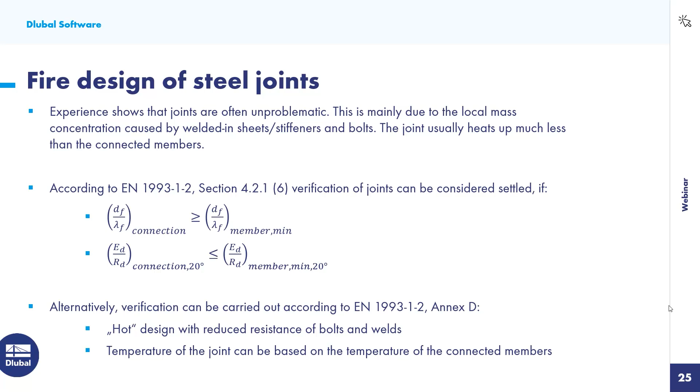The last question I want to tackle is how can I calculate the critical member temperature? This is also raised quite often. As I explained initially, the simplified member verification can be done resistance-based or temperature-based. And for now, we have only implemented the resistance-based approach since it is generally more economic and has a wider range of application. However, we are currently working on the implementation of this critical temperature calculation as well, as many customers are requesting this feature. So I hope I can give you an update on this very, very soon.